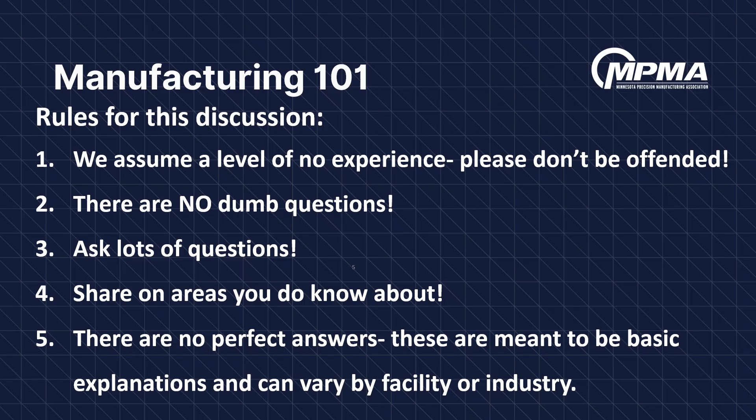So we're going to jump right into some manufacturing vocabulary. First is a Laer ton. If you don't know what a Lear ton is, it's the way a foundry measures molten steel.

Rule number 6, be careful who you trust with your questions. There is no such thing as a real Lear ton. It's just a different spelling for not real. So just a little icebreaker there, and a reminder that maybe you should verify who you're asking questions of.

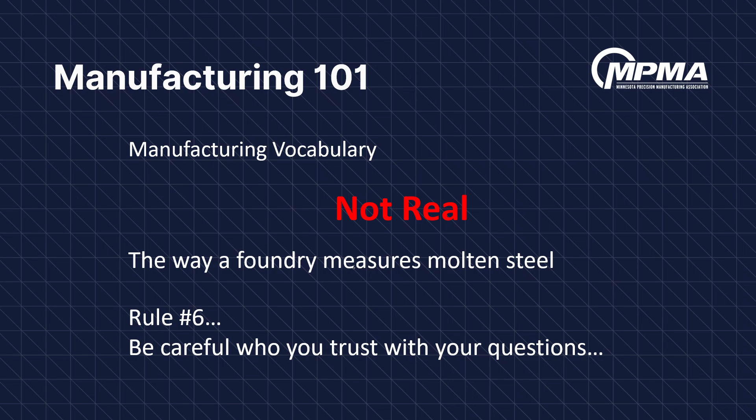Diving right in, we're going to start with the topic of general industry. One term you may be aware of is an OEM, or original equipment manufacturer. So those are companies that make their own product. They're companies like 3M, Medtronic, John Deere, Ford, brand names that you know, products you use every day.

They have their own product lines, and they use a supply chain of manufacturers, which we're going to talk about. So oftentimes these OEMs don't actually make all of their own products. They may make a certain portion of it. They may make the final product, the final assembly, package it, ship it out with their name on it. But as you will find out, there are many, many thousands of manufacturers out there that are supporting these big brands.

As I just mentioned, OEMs don't make everything, and they rely on their supply chain. The vast majority of manufacturers out there are actually at different tiers or levels within that supply chain supporting those OEMs. Those are what we call contract manufacturers. Contract manufacturers make product for someone else based on a contract.

And when I say contract, it could be as simple as just a purchase order, which is a contract. Sometimes it could be a long-term agreement that spells out pricing and deliveries and all kinds of details that control the relationship between the OEM and the contract manufacturer.

Many contract manufacturers are at different levels, again, where they may not support the OEM directly. Some contract manufacturers provide components or services to other contract manufacturers, which then support the OEMs. So this is your general machine shops, welders, fabricators, plating companies, just about every manufacturer you can think of other than those OEMs that are supporting the OEMs. Again, this is the vast majority of manufacturers.

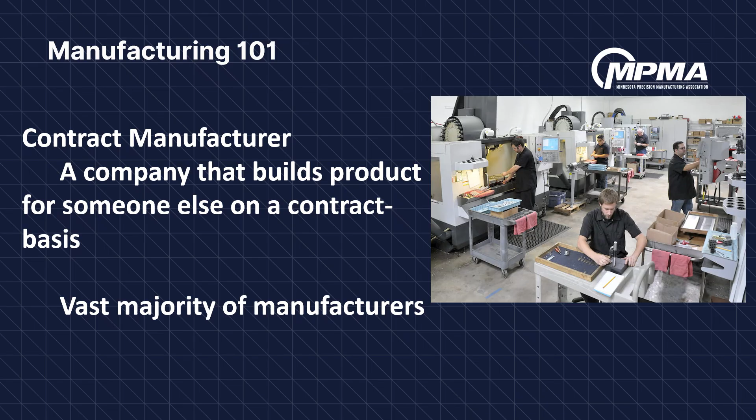These companies oftentimes do have production forecasts. They can do volumes of any type from single products up to millions of products. And then oftentimes have repeat work and can rely on forecasts and production orders and long-term agreements.

On the other hand, one type of contract manufacturer is what we call a job shop. You may have heard of that before. A job shop is a contract manufacturer. They do still work off of a contract, typically a purchase order, but typically more of a one-time purchase order or a short-term agreement, not the long-term agreements we see with some contract manufacturers of higher volumes.

So a job shop doesn't necessarily have a production schedule. They don't necessarily have a forecast. We call it a job shop because they kind of go job to job. Doesn't mean that they're not busy. Workload can ebb and flow.

But those projects typically will be things like tooling, one-piece fabrication, prototyping. They might be single projects, single-piece projects, several pieces, or several orders, but generally you don't have a long-term expectation or plan. You may have long-term customers, but they come back kind of project by project, and you can't really forecast that and know what to expect.

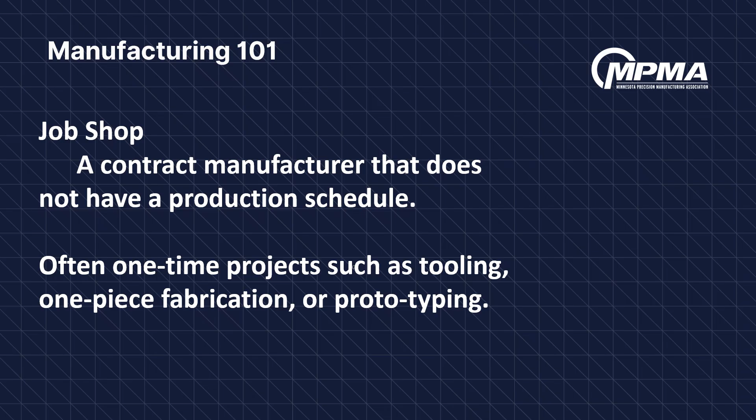The flip side, though, is that typically you will charge a greater premium for these parts. So often, a prototype is going to cost a lot more than a high volume production part, simply because there's a lot more engineering and time and less efficiency involved up front.

What you read about in magazines and watch on the evening news these days is often the cool new technologies used in industry and in daily lives now. What we call this in manufacturing is Industry 4.0, also known as the Fourth Industrial Revolution. This is all the cool new technologies, automation and equipment we're using to make stuff, but it's the latest innovations on how we're using digital technologies in the workplace. This includes the Internet of Things, AI, SPC, and automation.

So Internet of Things is really just the proliferation of internet in our workplace. Years ago, machines were run manually, controlled manually at the point of use. Now, most machines in shops are controlled with a program, but also connected electronically, connected wirelessly to the company's network. Through the internet, you're controlling machines, updating machines, monitoring machines. People could be working from home and monitoring the data on their machines. So the internet is obviously a lot more common in the workplace than it was 30 years ago, not just for emails and websites, but for running the shop and sharing data within the shop.

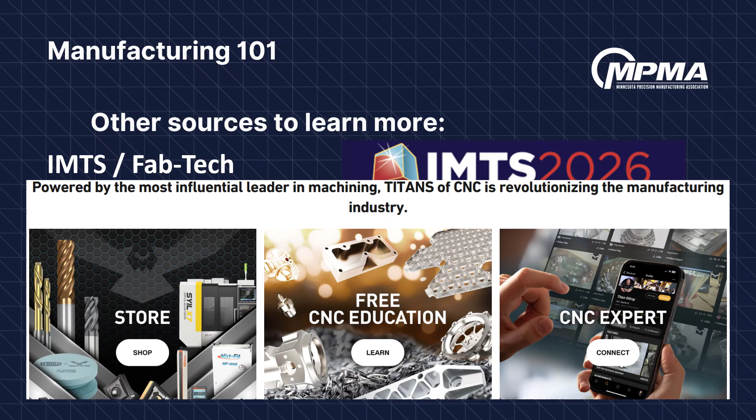It's free training he developed to share, especially with young people getting involved in the industry, so they can learn and grow. You have to sign up to receive it, but otherwise you can go in and start pulling up videos and programs and learn all kinds of stuff—how to square up blocks in a mill, how to use inspection equipment, how to do actual CNC programming. Some of that gets way beyond maybe where you're at, but there are simple applications where you can learn the basics, get started, and decide where to go from there. I'd encourage you to look into that.

For the next topic, we're going to dive a little deeper into machining technologies. You've probably heard the term additive manufacturing, which we'll talk about in a minute, but you may not have heard the term subtractive manufacturing—that's the process of removing material. In this case, we take a block of steel, a simple rectangular block, and take away material through a manufacturing process, in this case machining—here shown with an aluminum block. Basically we're removing material using a cutter. We'll talk about a few different operations, but you're taking an initial block and removing material to get to a final product, which in this case we'll call a widget.

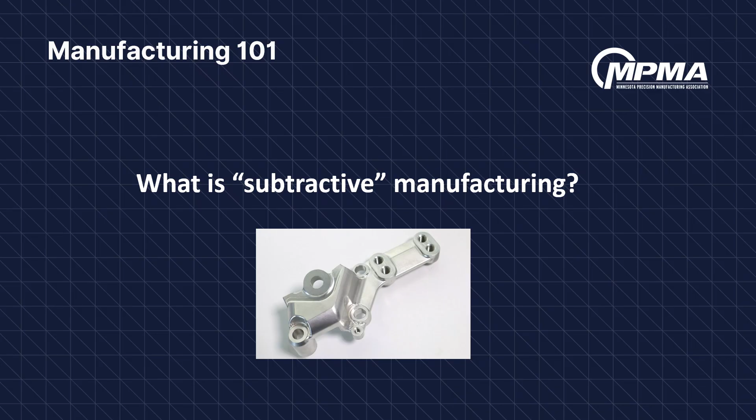In general, what you're going to see is that they're doing subtractive manufacturing. They're taking away material inside of that machine, cutting it away, kind of like a drill bit, taking away bits of material little by little. There are all kinds of different cutters and bits and tooling that take away material in different ways, whether on the side of the cutter or the face of the cutter. You don't need to worry about all those details, but just understand that most of those machines are taking away material.

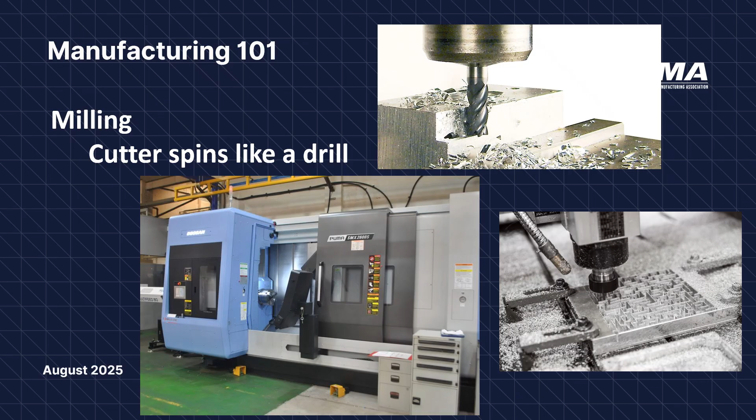Another common manufacturing process is turning, which is similar to milling. Milling, like you just saw, involves the drill bit or cutter coming in vertically and cutting into material. It can also come in horizontally, but the bit itself is spinning, rotating, while the product generally stays still, although it can move at different angles to get different geometries and approaches.

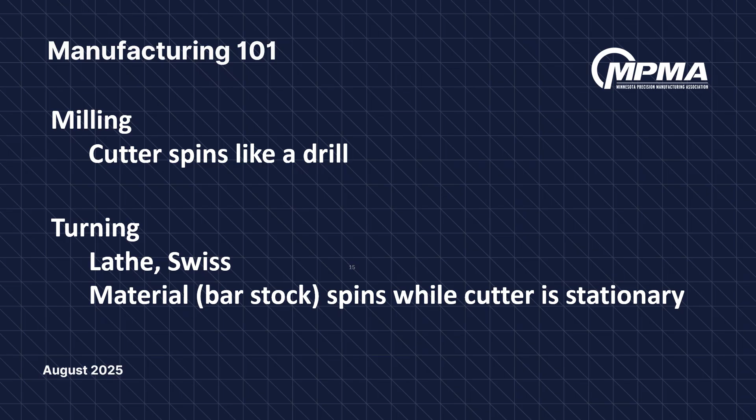Turning, on the other hand, which you've maybe heard called lathe or Swiss, are different types of turning operations where you're actually spinning the product. The material, often referred to as bar stock, a cylindrical rod of material, spins while the cutter stays stationary.

What you see in this picture is a lathe. It's hard to see all the details, but on the left-hand side there's what would hold the raw material, which would be fed from the left side of the machine in what we often call a bar stock feeder. You'll often see those hanging off the end of the machine. The bar stock is fed into the machine and spins while the cutting tool stays stationary.

In this case, the cylinder of material spins at a high rate of speed, and the cutter takes away material little by little. This is often used for threaded components, with high, tight tolerances, really small, intricate, detailed parts. That's when it's referred to as Swiss - more complicated, tight tolerance, threaded components typically.

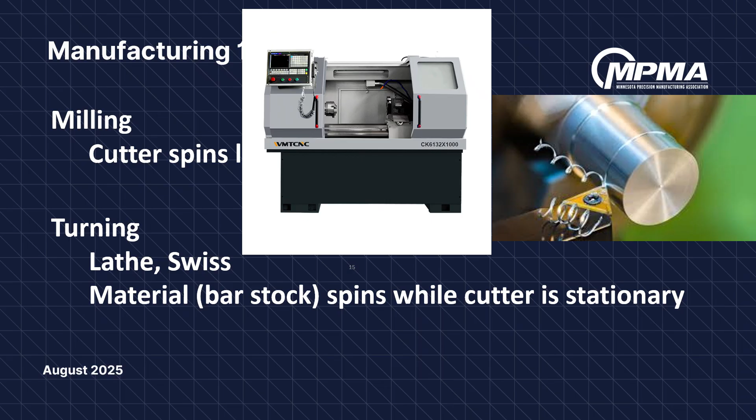Now that we've talked about the front-facing activities of manufacturing, the things you see, touch, and feel, and machines that are operating, we're going to talk about the front end - the things you don't necessarily see. We'll go through the phases of a project from start to finish, until it gets onto the shop floor. You start with the design of a product.

You've maybe heard the term CAD before - that stands for computer-aided design. Examples of the software would be Autodesk, SolidWorks, Pro-E. So you have a designer sitting down and designing the actual product.

This is typically done by the OEM, the original equipment manufacturer, because they own the product. They've got design engineers, product engineers, marketing people - all the people that go into deciding what a product's going to look like and how it's going to operate. The CAD designer sits down and figures out exactly what the product looks like - the shape, size, features, geometries - piecing it all together.

In this case, you might have dozens of components that go into an assembly, so they're figuring out how those are all going to interact and fit together. It's very critical to make sure this is done right prior to manufacturing.

What you'll often see is that a designer may not necessarily know the manufacturing processes, so they may create a model of a product that looks great and theoretically works well, but then a manufacturer would come along and say you can't manufacture it that way - there's no way to actually produce it that way, or it's horribly inefficient.

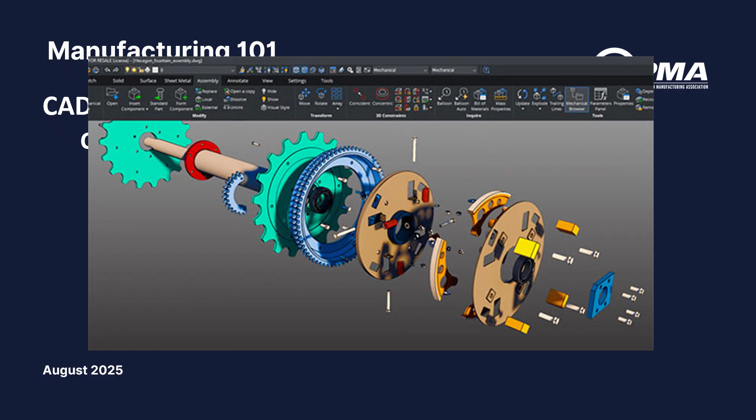Oftentimes that CAD designer is going to hand off that model, that design, to a CAM person, a CAM programmer. CAM stands for Computer Aided Manufacturing or Computer Aided Machining. Some software examples would be Mastercam, GibbsCam.

This person is going to take that model, that design that comes from the CAD designer, and figure out how to manufacture it. Just because you design a product on paper doesn't necessarily mean it's manufacturable. So the CAM programmer is going to figure out what machine to use.

This person is actually writing the code or the program that's going to be used in the machine to tell the machine what to do. So they're kind of writing the program for the machine.

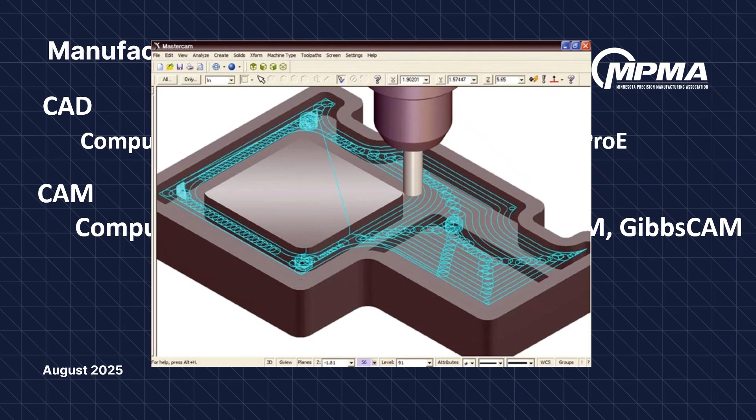Which leads to the next one, CNC, that I'm sure you've probably heard of. That stands for Computer Numerically Controlled. It's basically just a fancy way of saying a machine that has some kind of computerized system. I mentioned earlier you will have manual machines that don't have all the computers attached to them, but most manufacturing done today is done in CNC machines.

Again, they're computer controlled. Somebody's writing a program for it, uploading that program into the machine somehow, and then the machine is run based on what that programmer told it to do.

The machine operator—and you'll find that every company has varying levels of machine operators. Sometimes they will be more push-button oriented, where they're just taking a program that exists, loading and unloading the product, and pushing a button to go, over and over.

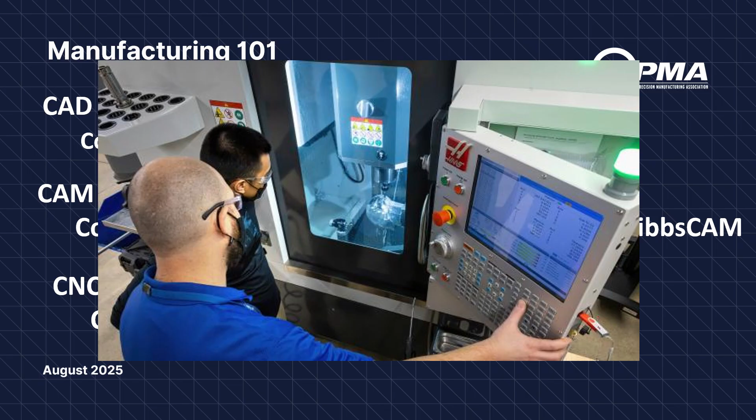Today we see more and more CNC machinists that are trained to actually modify the program if they notice the machine's not running quite the way they want. If there's too much chatter or the surface finish isn't right, they can adjust that program at the machining center to get it fine-tuned.

The third topic we're diving into is other manufacturing processes. There are dozens upon dozens of different manufacturing processes, so you will never learn them all, and I wouldn't worry about that. The few we're going over today are some of the basic ones, and in many cases, when you're in shops and see machines you don't recognize, they may just be slight deviations from processes you already know. That's a great opportunity to ask questions and find out how those machines and operations might be slightly different. If you learn the basics, you'll have a pretty good understanding of what that machine is there to do.

So the first one we're going to talk about is tool and die, one of the more complicated, highly skilled manufacturing processes. What we talked about in machining is an end product—you're not necessarily mass producing, but it's an end product, so it may be thousands or millions of parts you're making. On the tool and die side, it's usually one-off or just several of something.

Some examples are injection molds, die casting, and fixtures, and those are manufactured products that are used to make something else. A fixture, you're not going to necessarily sell in a store—typically it's used to hold a piece of material that's going to be manufactured into some other final product. An injection mold is not a sellable product to the public either, but it's used to make other products. Same thing with die casting.

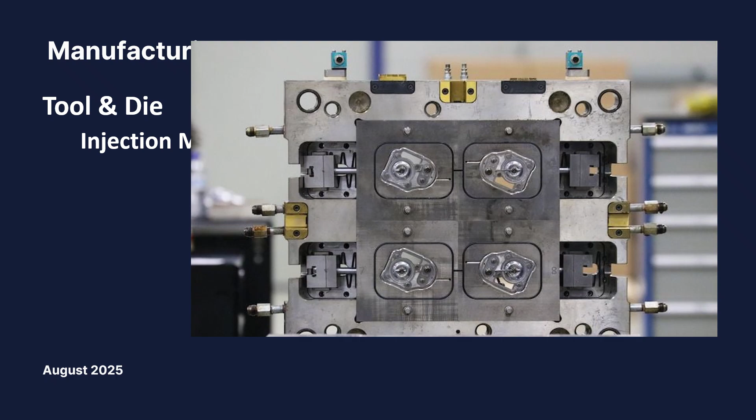And there's all kinds of other moving components in this injection mold, and then it'll spit out a product. Again, this isn't a product you'd see on a shelf anywhere, but manufacturers use these every day to make products that you're familiar with, through injection molding.

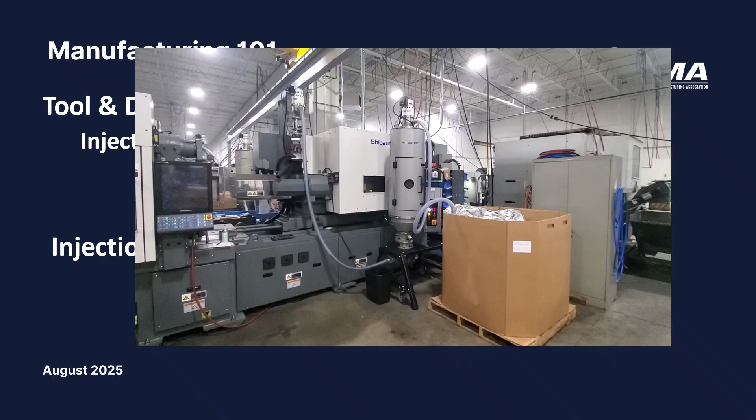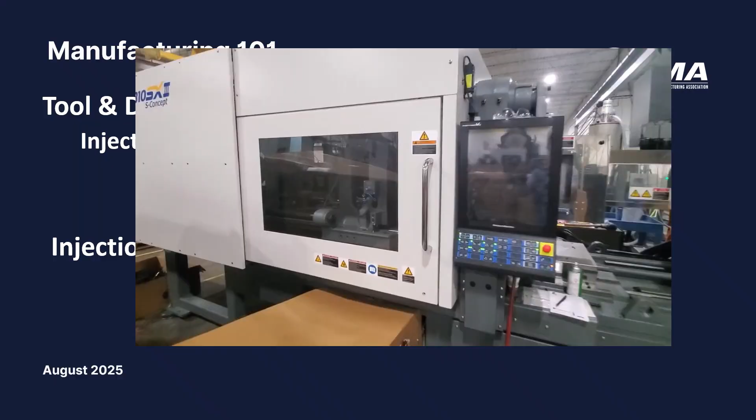Injection molding takes that mold we just showed and uses it to make a final product. This is an injection molding machine. It takes raw plastic material, pellets, puts it through a heated barrel with a screw that pushes the material forward into the injection mold you see in front of you, which is actually heated and cooled simultaneously. The molten plastic goes in, forms the shapes of the parts, and then spits the parts out.

Again, there are lots of other moving components and things going on, but this is a process you may not have seen in shops, though injection molding is used to make parts you touch and work with every day. Parts that go into your cell phone, your computer, your car are oftentimes injection molded. In fact, metal injection molding is becoming more and more common now.

Typically parts used in firearms or dental braces, things that are very intricate and detailed but maybe higher volume, can be produced using metal injection molding, which I won't go into detail on today, but it's an interesting process. The next process we'll talk about is EDM, or electro-discharge machining.

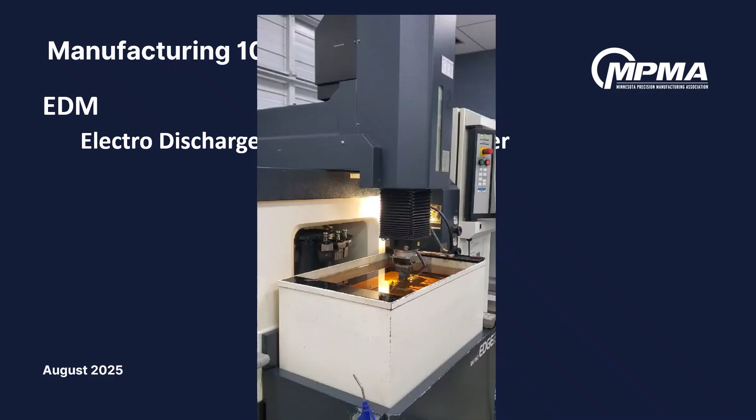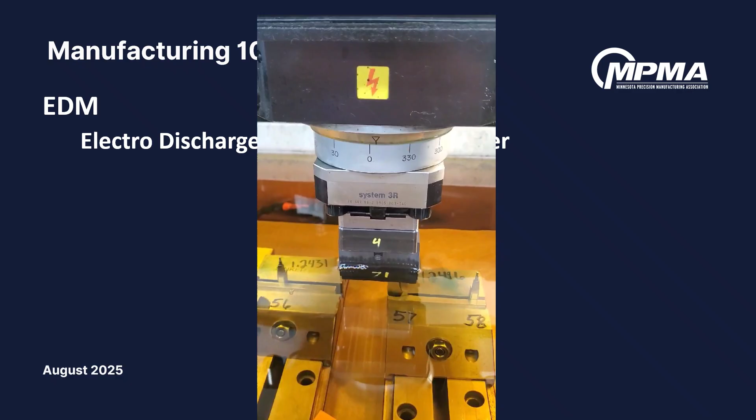Two examples of that are wire and sinker EDM. We'll talk about sinker EDM first. This takes what's called a carbon electrode, a piece of carbon material with geometry cut into it, which is mounted into the machine. There's a fluid called dielectric fluid that's used to convey the electric charge. The electricity goes from the carbon electrode through the fluid and into your steel block.

This is often used for parts with geometries that can't be machined. Today, machining centers are much more capable and can hold tolerances and perform geometries that couldn't be done in years past, so EDM is maybe a little less common than it was 10, 15, 20 years ago. But oftentimes it's used for details you just can't machine out.

This allows you to basically eat away the steel little by little, taking away microns at a time. So oftentimes EDM processes will take hours, if not most of a day, just to take out some small amount of geometry because it's done in such small amounts at a time, very intricately.

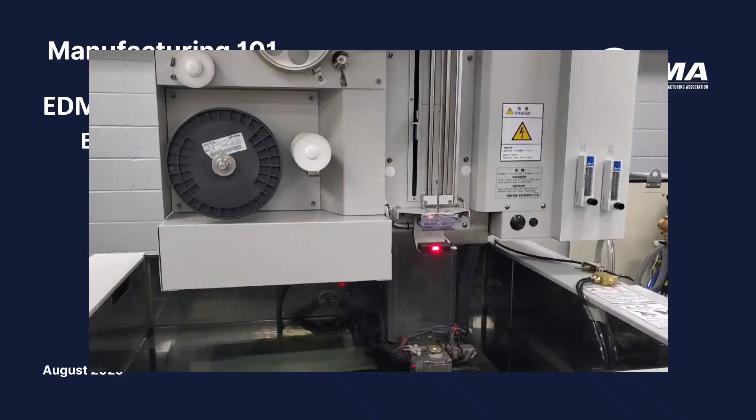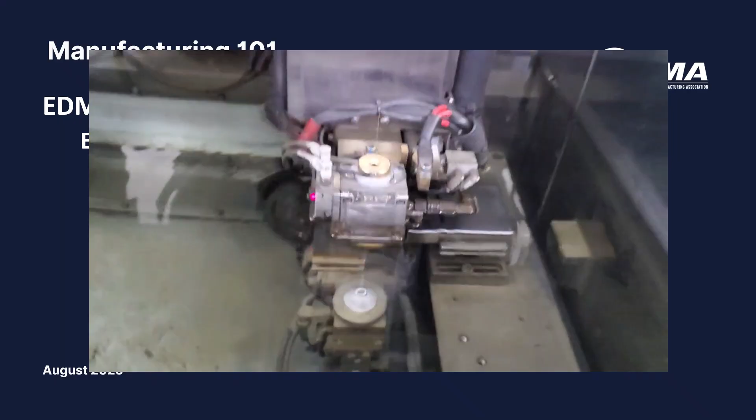Another process is wire EDM. This is very similar to sinker EDM, but instead of using a carbon electrode, it uses a wire. The wire is fed and cycles through the machine, using that same electric current to spark away the steel you're removing. This is often used for really intricate external geometries, perimeters around a part, where you need to cut very finely and very precisely.

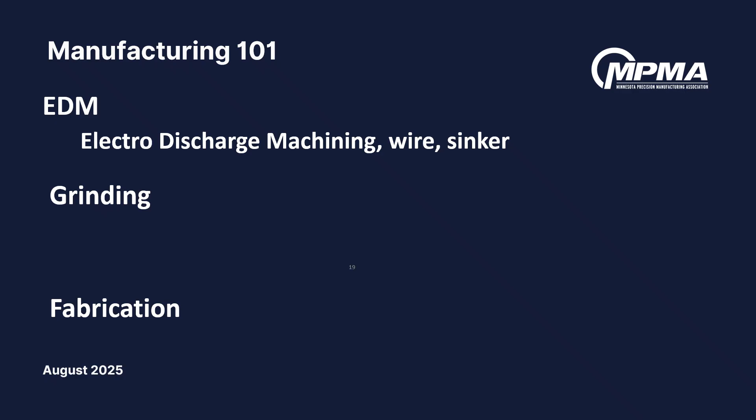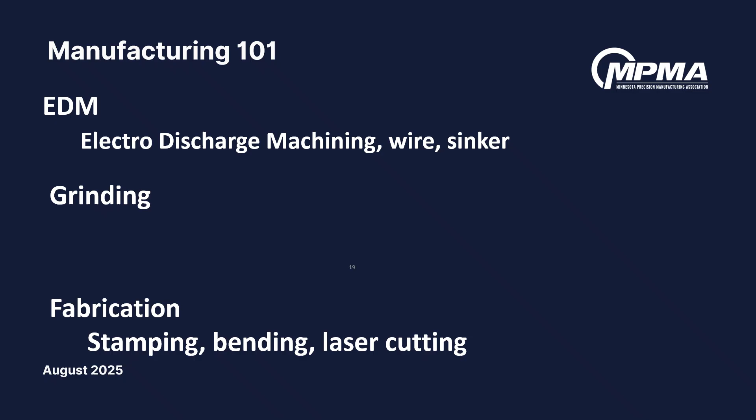Next we're going to talk about the favorite manufacturing process of many middle schoolers and high schoolers, which is additive manufacturing. You may have heard that term but maybe didn't know what it meant - it's basically building a 3D object layer by layer. Subtractive manufacturing is taking a block of steel, plastic, or otherwise, and removing material to get to the final product. Additive is starting from scratch, starting from nothing, and producing something.

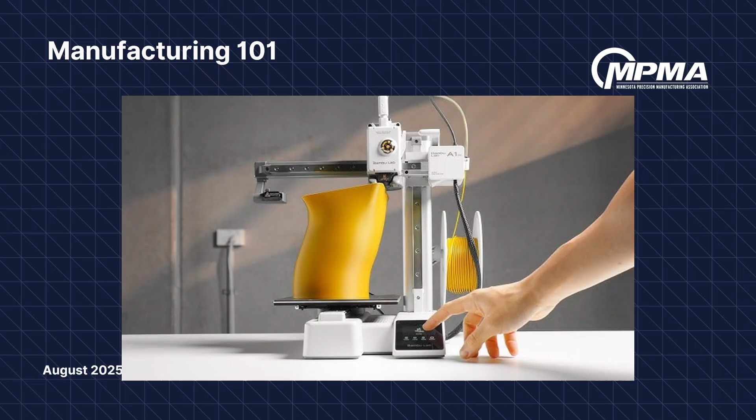In general, it's 3D printing. Again, there are many different types of 3D printing which I won't go into today, but in general you're starting from nothing and layer by layer adding little bits of material to create a product from scratch. In many cases there are products that can't be manufactured through subtractive manufacturing that need to be done additively. In other cases it's just easier to do additive - you can take a design and make it using a 3D printer, many times used for prototyping and first-off products, low volume products.

Not necessarily the precision, although the technology has expanded and improved greatly over the past years. 3D printing is very capable these days, but there are still some applications where it can't hold the tolerances and can't produce as fast as other manufacturing processes. So it has its niche uses, but those uses are expanding daily, and it's really innovated the way shops operate nowadays. In the past, if you needed a prototype, you put in a purchase order with another shop down the street and it took 2-3 weeks to get. Now you might have a prototype in a matter of hours, giving shops much more flexibility to design and develop new products.

The last topic we're going to talk about today is government and education, which may seem like an odd topic for beginner manufacturers or people new to the industry, but workforce is one of the most important topics for every manufacturer these days. We need more people, more skilled people, and need to develop the people we've got.

Often people new to the industry are either the new person coming into a skilled trade, or an HR person who needs to understand what government and training programs are available. It's important for us to understand what resources there are and be able to share them. Everyone has their different definitions of different words and examples, so again I'm going to share my experience and definition of a couple of these words, but in general it represents most of what's happening within the industry.

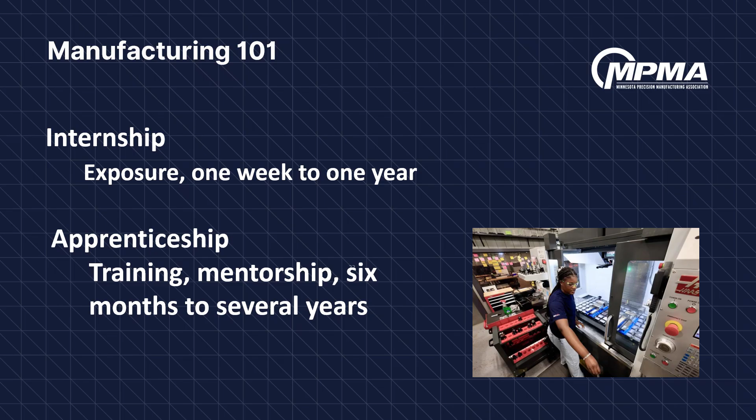Learning and building their skills and getting paid, so it is a job, but then developing into that full-time machinist or welder or otherwise. Minnesota has a lot of great resources for workforce development. What we refer to affectionately as DOLI is the Department of Labor and Industry. This is oftentimes intended to protect the workforce, support the workforce. Department of Labor oversees unemployment and employee rights and whatnot, but they also have programs around workforce development and developing those people.

DEED is the Department of Employment and Economic Development. This is a little bit more focused on business and developing and growing businesses, oftentimes through employees. There are many great workforce programs through DEED in Minnesota, but it's a little bit more focused on the employer and helping those employers grow. You'll also find DEED as a resource if you were going to build a new facility in a community. DEED can help you find different economic support resources and financial incentives through that community.

The Office of Higher Ed, OHE, oversees higher education in Minnesota, the post-secondary schools, which includes the Minnesota State College system. So all of the technical colleges and state colleges fall under the OHE. Oftentimes MPMA is highly partnered with especially the tech schools that fall under OHE, which is also involved in some of the workforce training programs. Last is the MDE, the Minnesota Department of Education, which is more K-12 focused. For our sake, we're typically dealing with the tech ed programs in high schools and internships and some of the other programs that MDE offers.